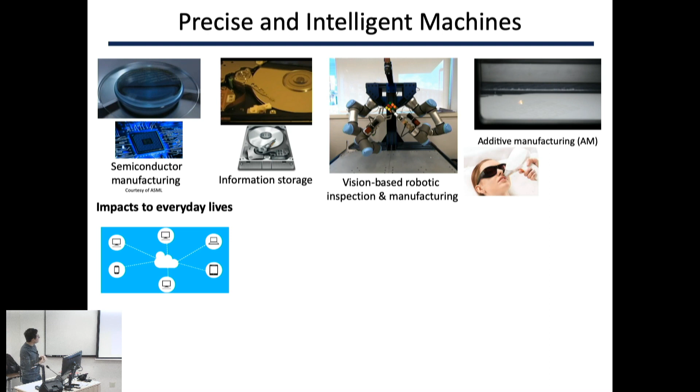I worked a lot on how the semiconductor industry manufactures the computer chips used in computers, cell phones, tablets, etc. It's a control problem you see over here. We are controlling the motion of these wafer stages precisely to make the process called photolithography happen in the way that we want.

I also work a lot on nanometer scale precision control in something you find in everyday life. It's perhaps the best example of precision control we can find in everyday life. Just $80 and you can have a nanometer precision control device: the read-write head in hard disk drive systems. They do super fast and very high precision control of the motion to either read or write data onto the spinning disks.

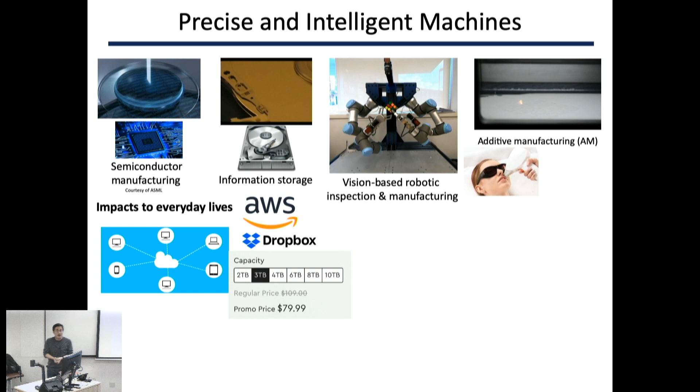I also work on robotic systems that look like this, mostly for manufacturing, and it's very playful. I find it super fun to work on these problems. We can solve a Rubik's Cube using robots, but this is just a demo.

It turns out many of the techniques we do here can be translated to do vision-based inspection, for example in the aerospace industry.

Another example I do myself is in manufacturing systems, using lasers to process very fine materials, either metallic or polymer powders. This is super useful nowadays to make parts in complex geometries and shapes, for example engine components for aircraft, where we want to use less material for better fuel consumption, allowing us to fly longer using lighter aircraft.

There are also a lot of scientific discoveries about being able to make complex things in a very rapid fashion. There's a totally exciting branch of papers about metamaterials, for example, that use additive manufacturing.

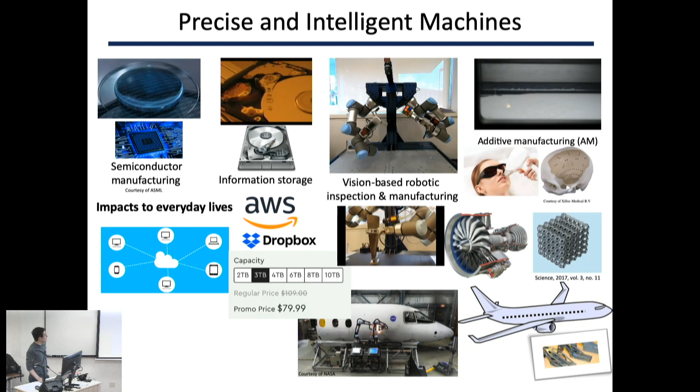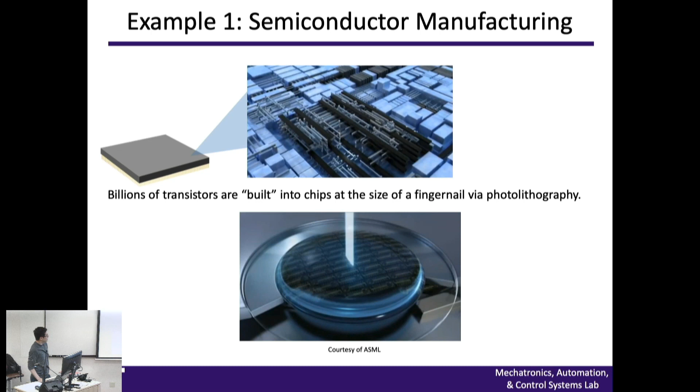To give you a little more specific ideas, this is the control we talked about for photolithography, where we use projected light to build billions of transistors onto chips the size of a fingernail. This is repeated many, many times, done in a very clever fashion, because the features we want to build into computer chips are so tiny. How can we make sure we're building such features precisely?

It turns out we have big patterns originally. We have a mask, and then we project light onto the mask, and use a lens to focus this pattern onto the wafers. So we need to control the motion of the wafer stage and the reticle stage very accurately.

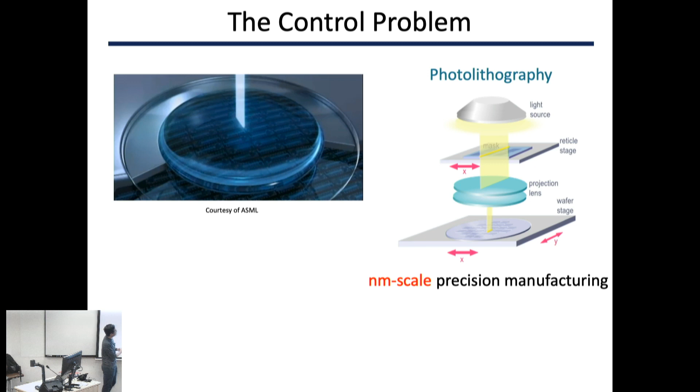Imagine how it looks in reality: drive from the airport to campus, drive it once, drive it twice, and the resolution of the control here is that the trajectory of the tires must be maintained within millimeter scale error tolerance. A human cannot do this; you must use advanced control techniques, and you have to maintain the same tolerance every day.

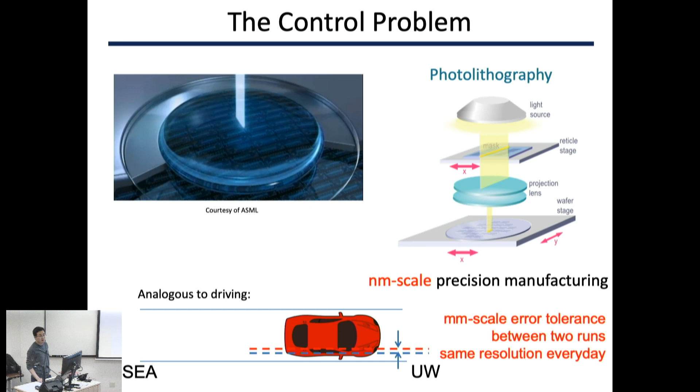With weak control, we cannot do that. With enhanced control, we can reach such kind of resolution.

More broadly, control is super important. We have lots of faculty in the mechanical engineering department working on precision control problems. I'm doing some of the things that you see here.

Just to recap the control problem here: it's like flying an aircraft at super high speed, just a tiny little bit of space above the ground, and you have to switch lanes very rapidly like this, and then you need to maintain the tracking of each lane accurately.

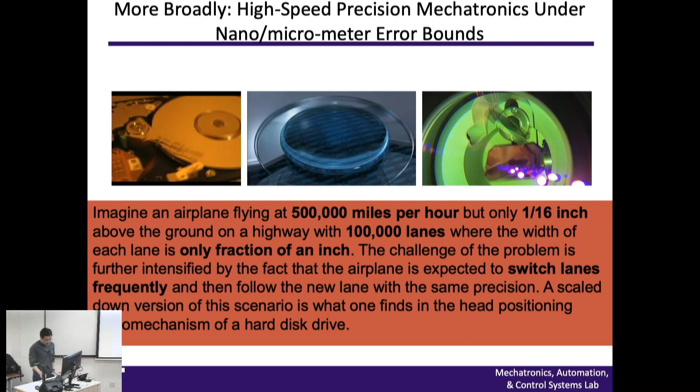Nanometer or micrometer scale precision control is a very important area that utilizes control heavily. I'll talk a little bit about some of the things we do here. My hope is that by introducing these examples, you will see how a control problem is formulated and then solved.

When we work on precision control of a very high speed spinning disk, we need to access data very frequently, and then there are these problems about vibrations. These vibrations happen because the disks are in an enclosed space with high speed airflow inside. This read-write head is literally just a tiny little bit of space above the spinning disks, so the complex aerodynamics creates vibrations. What we think is a super flat surface is no longer a super flat surface at nanometer scale precision.

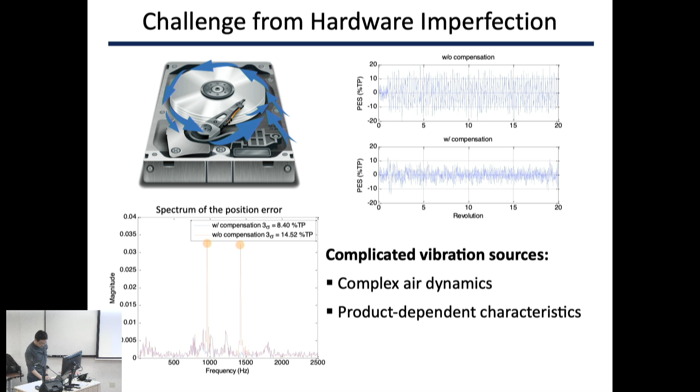The disk drive industry is now moving more forward to enterprise storage, where we use them in clouds, in data centers. This creates new problems. What was working perfectly fine may not work as we desire in this new application, because whenever you stack a lot of precision mechanical components together, you face the challenge of vibrations propagating from one disk to another.

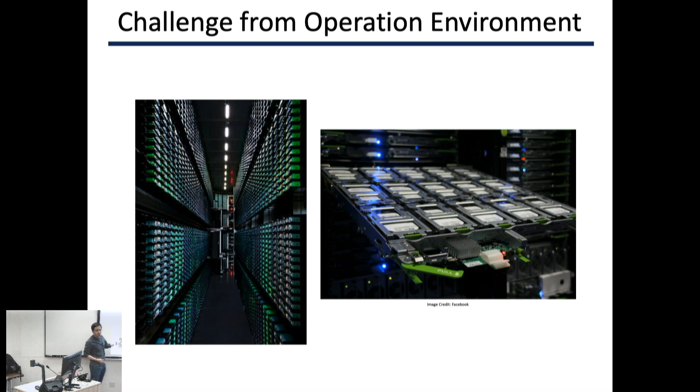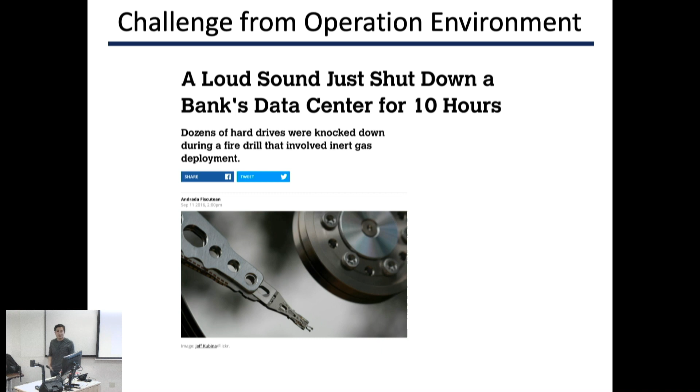Excuse me, Professor, can you pause for a moment? Do you have a cell phone in your pocket? I do. Can you put it away? Does it work better? Yes, okay, thank you, see, right?

Acoustics, vibrations, real problem. This is a super complicated problem, and it's new to control because you all know about the concept of bandwidth, below which classical control can do well. But these vibrations from the acoustics, from the sound, many of them are high frequency. When we speak, human voice can go kilohertz.

These vibrations are not covered by conventional controllers, and they are not single frequency like we saw previously. It's much more complicated, a very wide frequency band with multiple bands. This also depends on the environment, obviously, so control is even more challenging here. With good controls, we can reduce these vibrations at multiple frequencies.

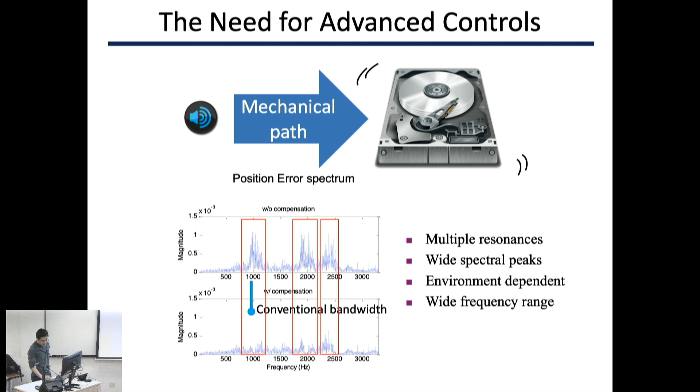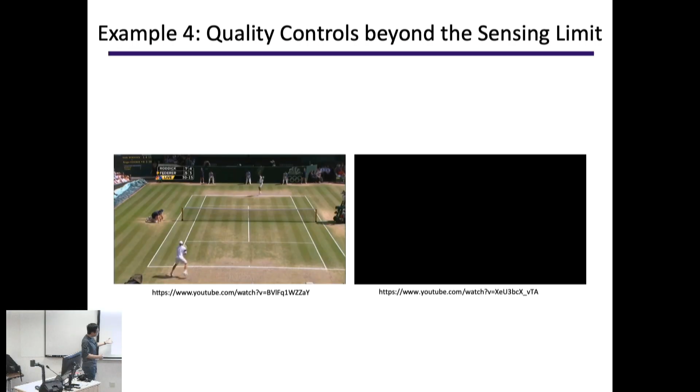All right. I have tons of other examples, and maybe today I'll stop at one that I hope will be really intuitive and interesting. If you think about how humans do control, it's not a precision machine, it's not a disk drive that can do nanometer scale precision control, but humans can do things like this. This can happen in reality.

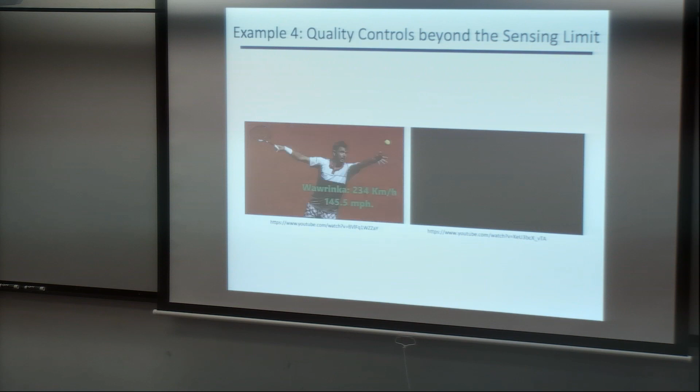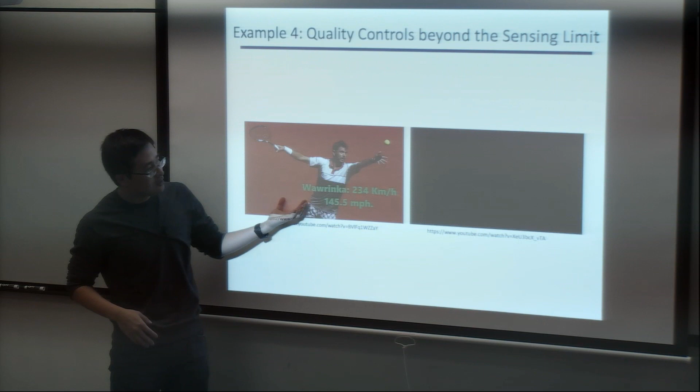When we play tennis, humans can go from this to something like this. We can catch a ball at very high speed during normal play. I cannot compete with them. You probably can't either, but some of you may become future tennis players who can compete at this level. But you see the point: control is something that we can learn.

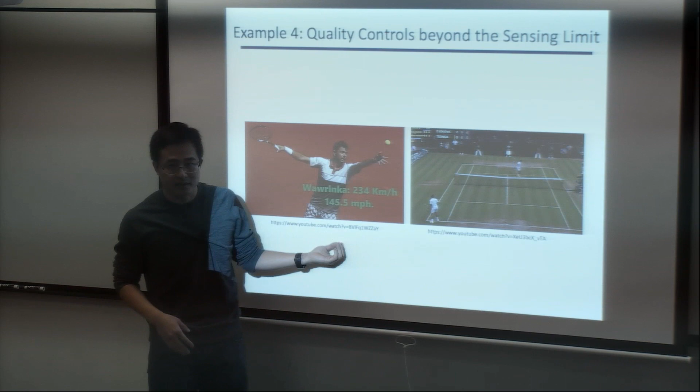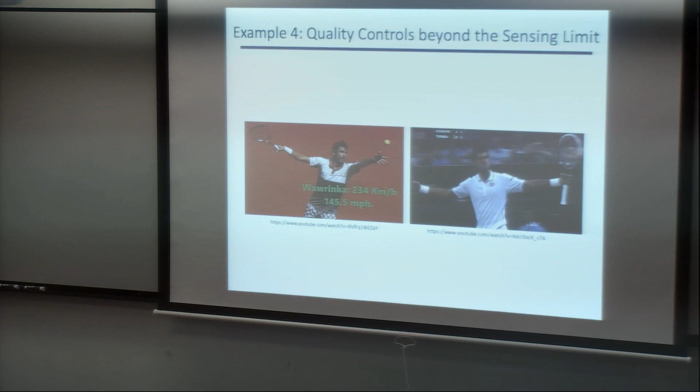As we understand the game better, as we understand our opponent better, we can build models, we can train ourselves, and if we do hard enough, we can do things that weren't achievable previously, and we can get super excited about it.

What we do from that point, if you imagine the key problems, one component is that humans use vision a lot for playing tennis, at least, right? Maybe we use our ears as well. These are sensors that have fundamental limitations. I cannot see from here to the East Coast. I cannot hear what's happening in a different town.

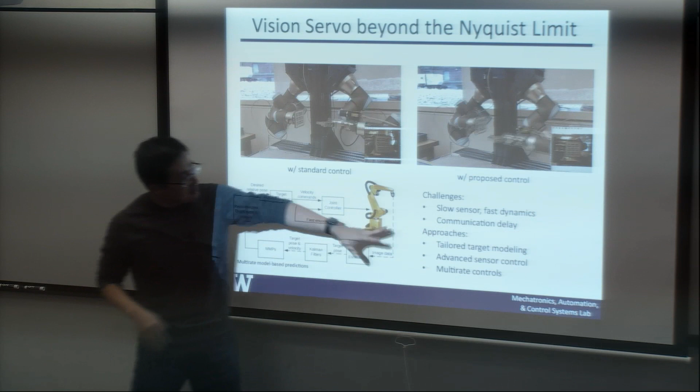These sensors have fundamental limitations. Cameras usually have 30 frames per second, 60 frames per second. They have limitations on how fast they can measure. But humans, as you saw in the previous example, can learn from that. Humans can do things using these slow sensors and can play tennis at a very high level.

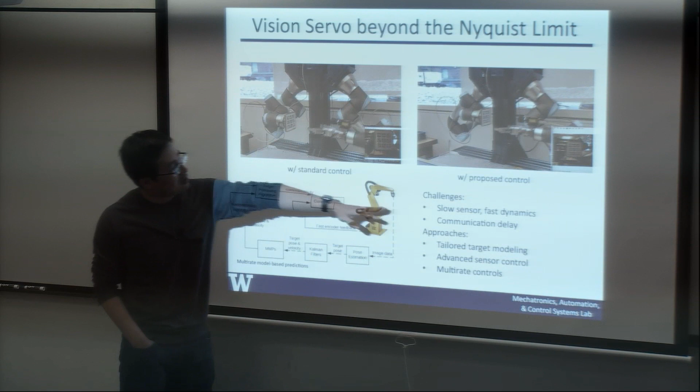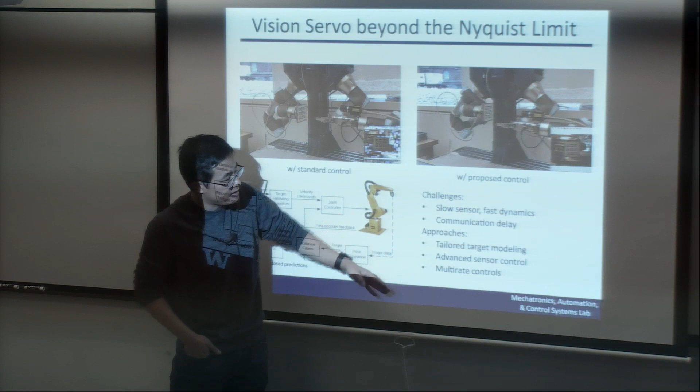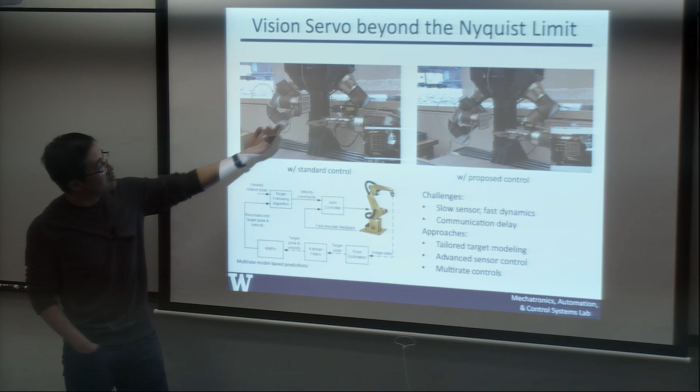We're doing something using slow vision sensors, and in view of the potential delays in communication with this large video data, it turns out that by doing controls, by doing modeling tailored for the application, by doing control of the sensor, we can create algorithms that track a moving object. This is with standard control, and with some advanced control, we can do better.

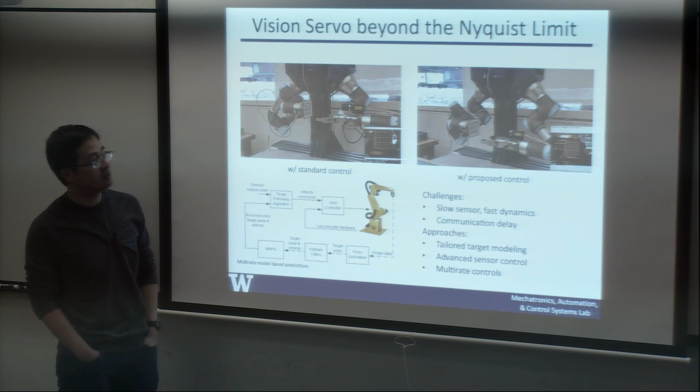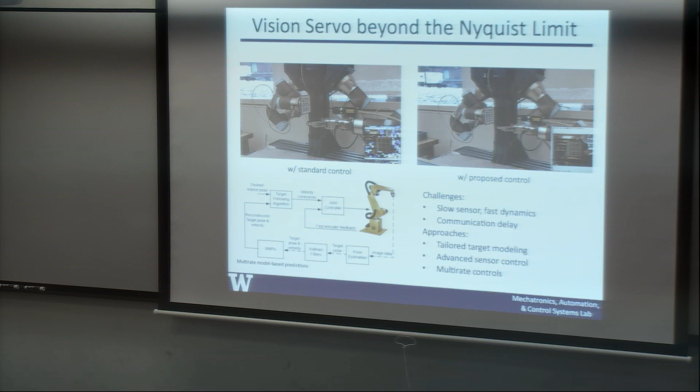These are some examples, at least, from my research. There are a lot more, as I mentioned. The field of control, I think, is really exciting. As we move together through this quarter, I hope to introduce more examples to you, either from my research or from colleagues at the ME department or elsewhere.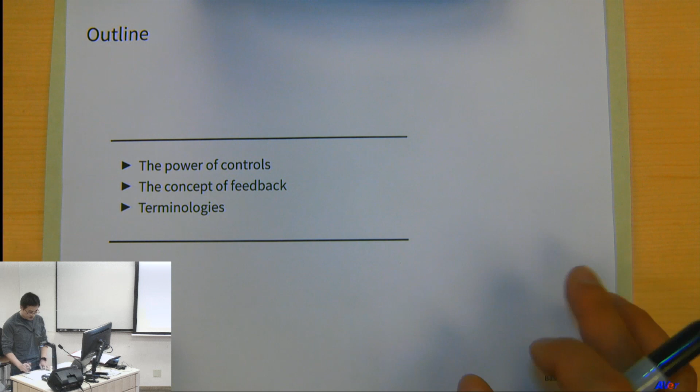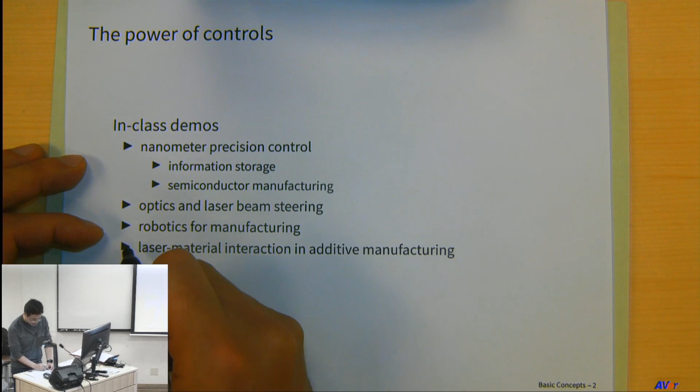Thank you. All right, that's the outline: power controls, the concept of feedback, and terminologies. We demonstrated nanometer precision control, laser-based additive manufacturing, and robotics for manufacturing. I didn't talk about this one yet; I might come back to it someday in the future.

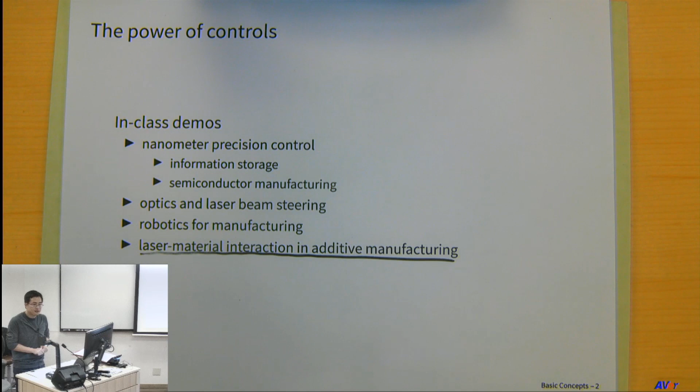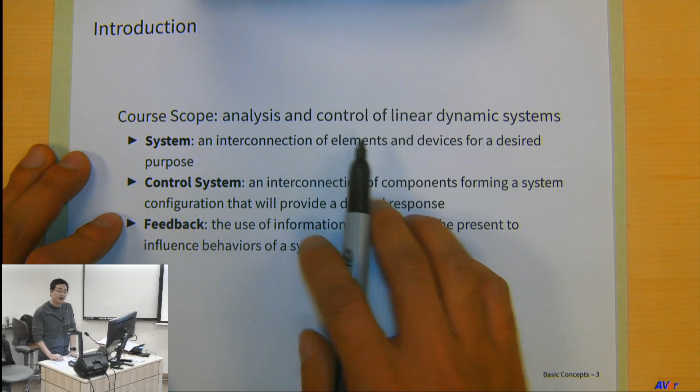The control language used to work out the planning of these systems is mostly based on linear control theory, which is what we talk about in this class. The scope of this class is about analysis and control of linear dynamic systems, to be more precise.

In this set of notes, I would like to formalize these concepts clearly, starting with systems. A system is an interconnection of components that serve some purpose. A human is a system, an integration of body and different components—a very versatile system. A hard disk drive system is formulated to do one thing really well, which is controlling the read-write head to access data.

So a system can be uncontrolled or controlled. The control system is the integration of components forming a system configuration that will provide the desired response. We apply controls, and then we see a response, and we can use that response in what we call feedback. Feedback is the use of information, either from the past or present, to influence the behavior of a system. All these examples use feedback.

It happens in everyday life too, if you think about it. Every day when I wash my face, I do feedback control. Because it's winter time, and the water is pretty cold in the morning, how I adjust the temperature of the water is a feedback control system. I first turn on the cold water, then the hot water—it's not an automatic process. I need to adjust how much hot water I get to reach the temperature I want. So it's a feedback system, a control system.

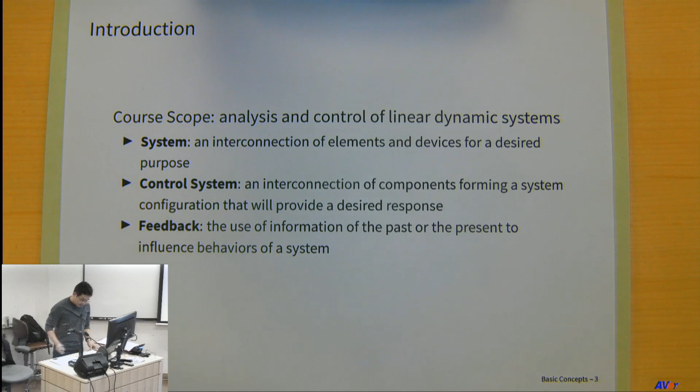That's just one example. But why do we need automatic control? Sometimes it's for comfort—if I have warm water, I feel more comfortable. But also there are many applications where feedback control, automatic control, is super important because humans just cannot do the things required. I cannot put my arm in the oven to measure the temperature. We have to use a feedback control system.

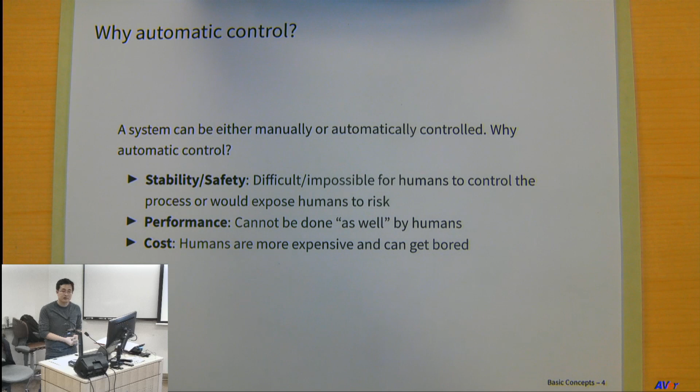Stability and safety is a big issue. Some tasks may be difficult or impossible for humans to do, so we need computers to do that. Or it may just be about performance—I cannot do nanometer scale precision control. We need these advanced control techniques because humans cannot do as well for many tasks. Also, humans can get bored and tired. So cost, either time or money, is another reason for the importance of automatic control.

Those concepts are relatively intuitive. Now I would like to talk more about the language we speak in control system analysis. Most of the things we do in this class can be translated into a block diagram, where we have a process, which is the thing that we want to control.

We want to control the output of a process—it's either the temperature of the water I use to wash my face in the morning, or it may be the position of a read-write head in disk drive systems. So there is the process whose output I want to control, and then I have some actuation to be able to influence it. The actuator is a device to influence the controlled variable of the process.

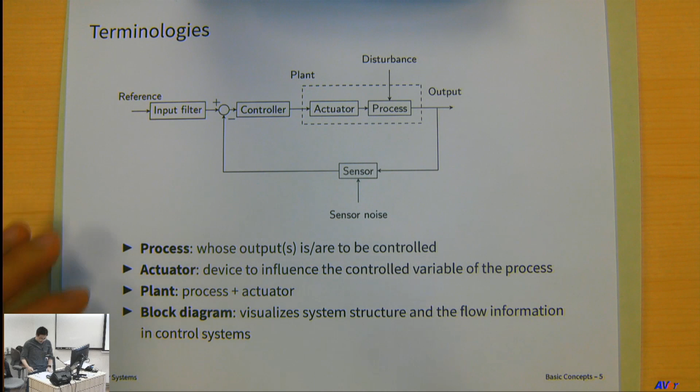The actuator in my washing-my-face example is the knob of the faucet. If I drive a car, the actuator would be the pedal that controls the torque of my engine. So the actuator and the process together form a plant. The plant is what we want to control using a controller—we generate control commands to this plant through the actuator and the process.

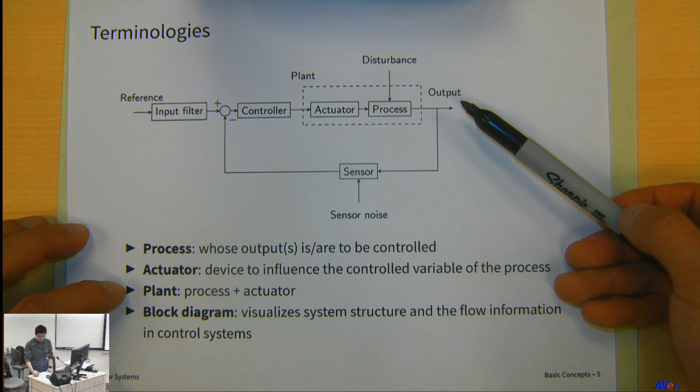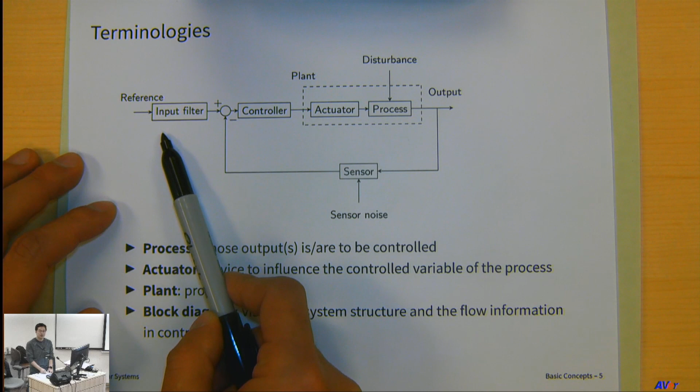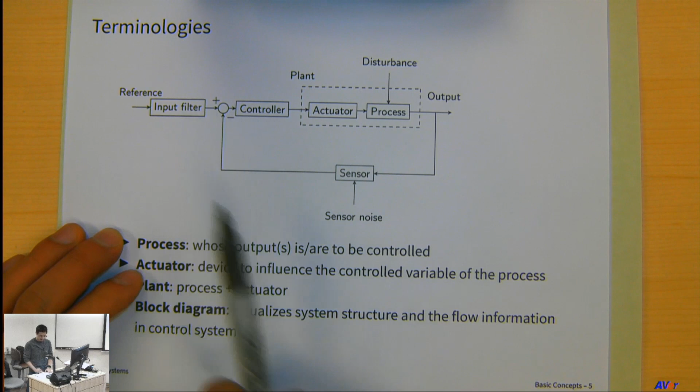So there may be additional components, obviously. We need sensors to measure what's going on. We need sometimes to filter a little bit of what I want in terms of feeding back to the system. I may have a concept of temperature that I want, but I may need to translate it a little bit so that's what the HVAC system in the house will look like. So I have a desired value - this is what I do nowadays with those thermostats. You can program it: I say 66 degrees when I'm out, 69 when I'm back. We need to filter what we want. We need to do a little bit of planning before we send this information to the controller. So input filter - this is very common in many control applications.

Very importantly, there's nothing that's perfect in practice. A lot of processes or plants are imperfect in many ways, so there will be disturbance going into the system. For example, if I drive a car, it's not just me driving - everyone is on the highway in the morning, and the disturbance is all those congestions on the highway. And then the sensor is not perfect either. I talked about vision having limitations on the speed that I can measure. In a lot of sensors, there are other kinds of noise as well.

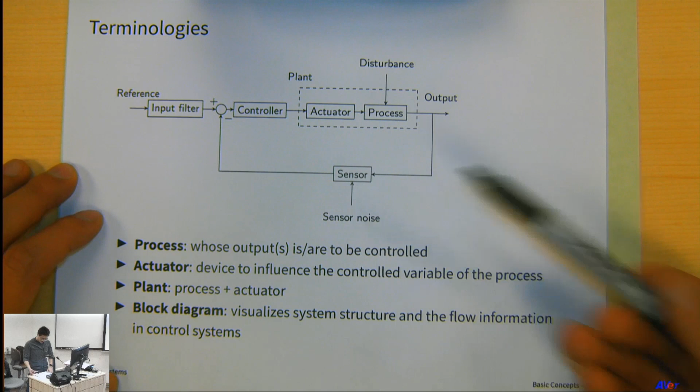Reference is what I want - it's what I want the system output to behave like.

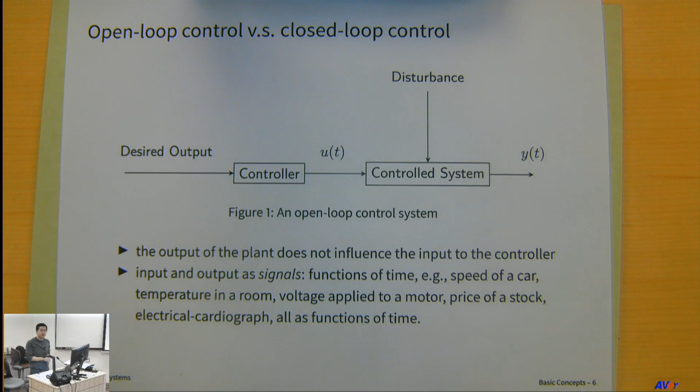You guys are probably very familiar with the concept of the difference between open loop and closed loop control. So open loop is something that looks like this in a block diagram. You have what you want, you have a system to control, and you just go forward. It's like if I want to walk a straight line, I close my eyes and then walk - that's open loop control. So I don't do feedback in open loop control. I don't measure the output of the system and use it to improve my control. That's the main concept of open loop control.

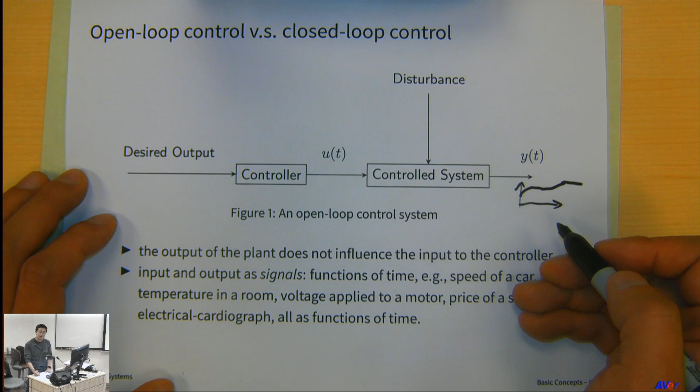Very importantly, the control system that we deal with - this desired output and this actual output - they are signals. They are usually not like a constant value, so they are functions of time. Either the speed of the car or temperature in the room, they are all functions of time. These are signals, either as a continuous function of time - for example, if I want my temperature to look like some profile that looks like this, maybe it's cold during the day and warmer when I come back. A signal can also be a discrete time signal, meaning that a signal can be something that looks like this.

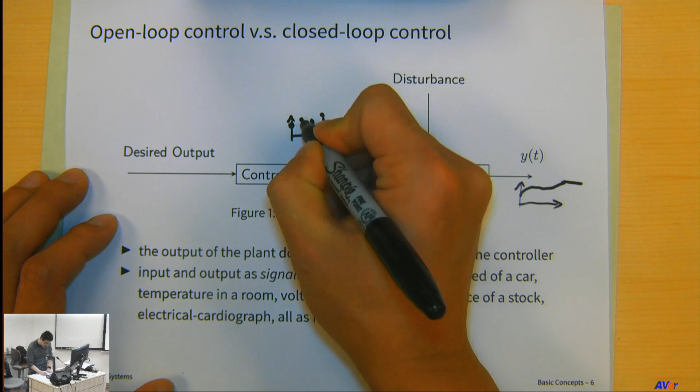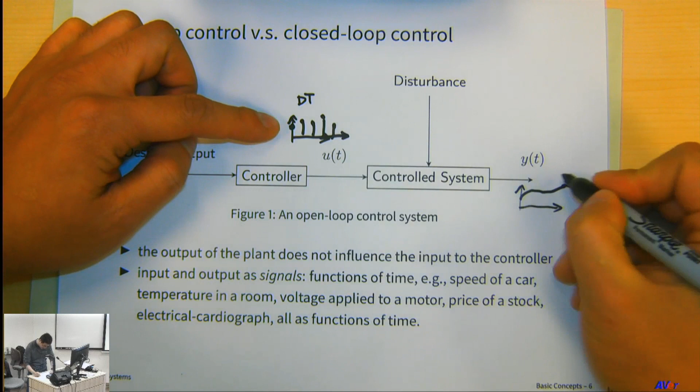It's still a function of time, but it's updated only at specific time instances. As a matter of fact, modern controls - the direct output from the controller is a discrete time signal. It's updated at every sampling time of a computer CPU clock, for example. So signals can be both discrete time and continuous time. My notation is usually discrete time and continuous time - dt and ct.

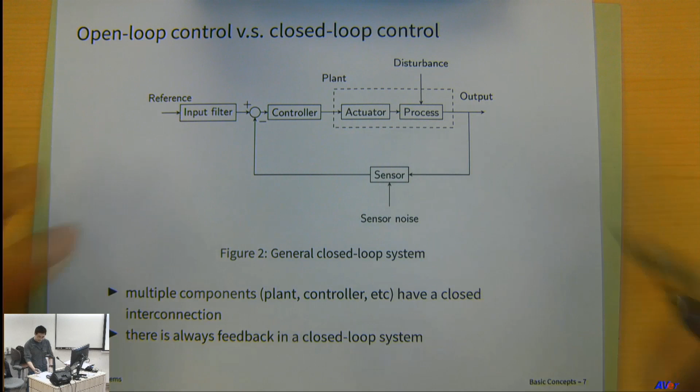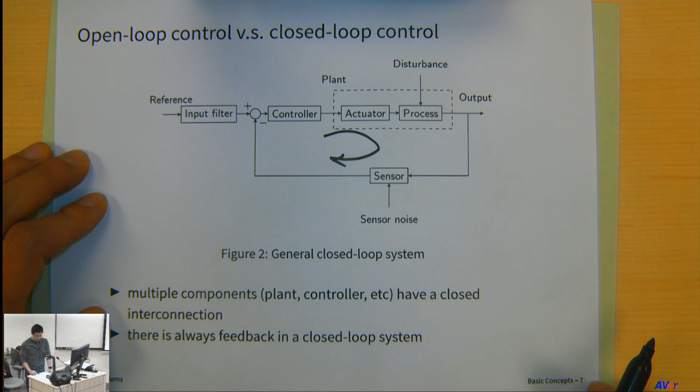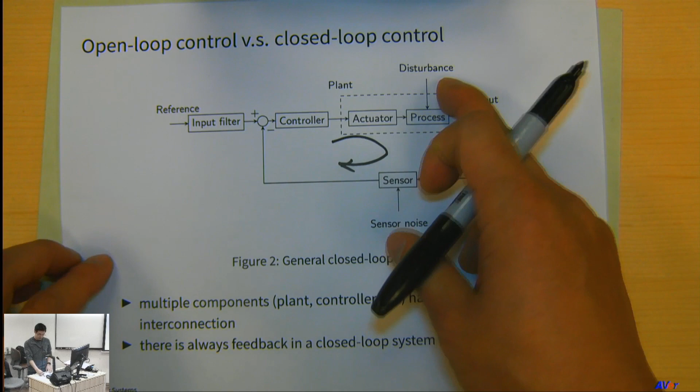That's open loop control. Now closed loop control is what we do a lot, what we need to do a lot actually in practice, because we talked about there being disturbances into the system, and then there's sensor noise, and the plant is not perfect as well. So what we do is we use feedback, to be able to accommodate some of the disturbances over here, some of the sensor noise over here. This is a closed loop system, because these components have a closed interconnection - so we have a loop over here that is closed. So a closed loop system always has feedback, and the purpose can be many things - there are many ways that we need to do closed loop. Disturbance accommodation is one of it, and that's one important aspect of it.

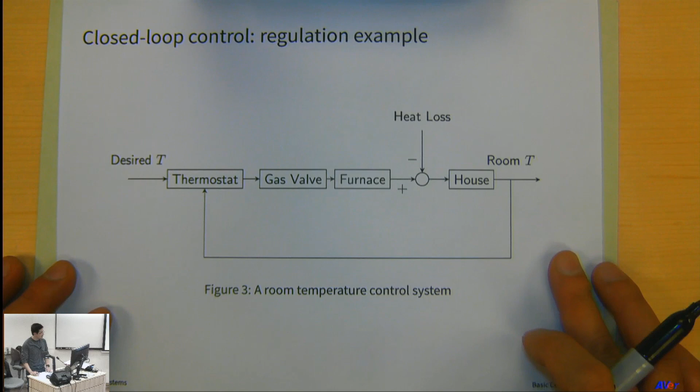All right, let's work out an example about temperature control - it's an HVAC system. Let's think about the concepts of plant, actuator, disturbance, controller, and how they can be put into this block diagram.

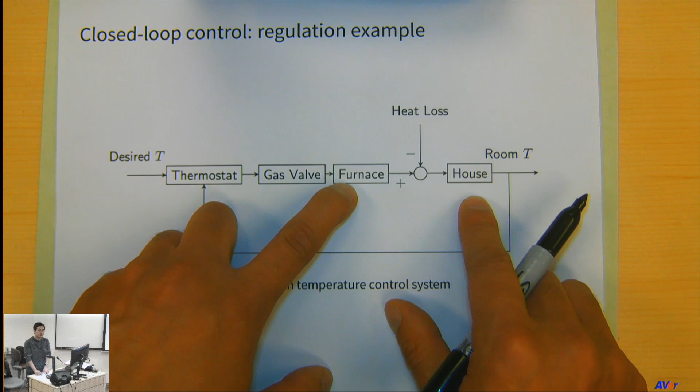Here, what I want to control is the temperature of the room. I have some desired value in my mind, so I set it in a thermostat. And then the thermostat is going to do, nowadays usually PID control, to the house. What is the process that I want to control? Perhaps the whole thing - I want to be able to control the furnace, how it generates heat to heat up my house. The process actually involves its own complicated dynamics, if you think about it. To heat up a room, there's convection, conduction, all these physical processes happening. So these are what I want to control - it is a process that we formulate and put into a block diagram.

What is the actuator here is the valve of the gas that goes into the furnace. That's the actuation that the thermostat can control. The thermostat will send out either current or voltage signals that define the degree of open for the valve, and then that valve influences the process.

And then we have the feedback. The control is being done over here.

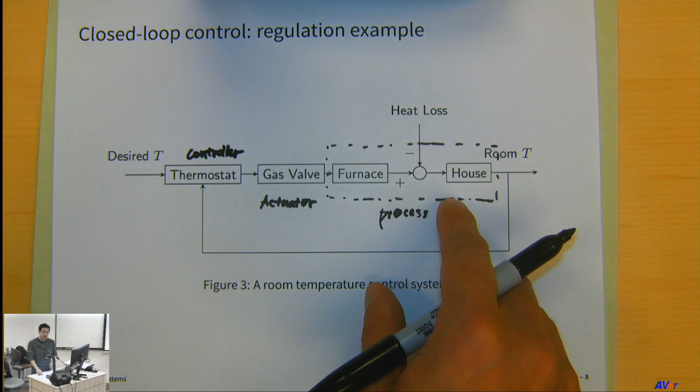So obviously there is heat loss in winter, right? A lot of the heat will be lost in the process. Either the furnace is not perfect or the temperature outside is low. So this is the disturbance.

That's how we can treat the system in a block diagram terminology.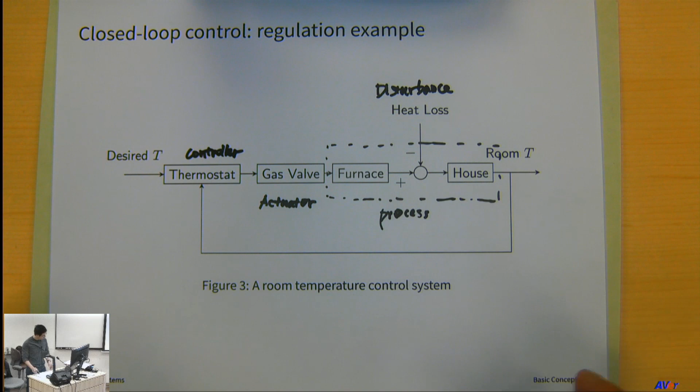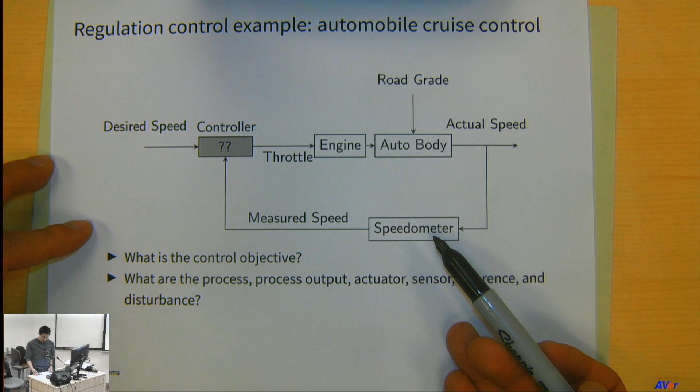Now let's look at another example as an exercise. Think about the control system in ACC, Automobile Cruise Control, which is very popular nowadays. We have the engine of the system, we have an auto body, we have sensors that can measure how fast the car is moving, and then we have a controller. It is a human or an autopilot in some of the modern cars.

The control objective is, in cruise control, to be able to follow a constant speed that I set, or if there are cars in front of me that block me from going to that speed, I will try to follow the speed of that car. That's the objective. Now, with that in mind, what is the process?

Output, actuator, sensor, reference, and disturbance. So I'll give you guys a little bit of time to think about it, and then we're going to work it out together.

All right, any volunteers want to talk about it? What's the process? Let's start with the first one, maybe.

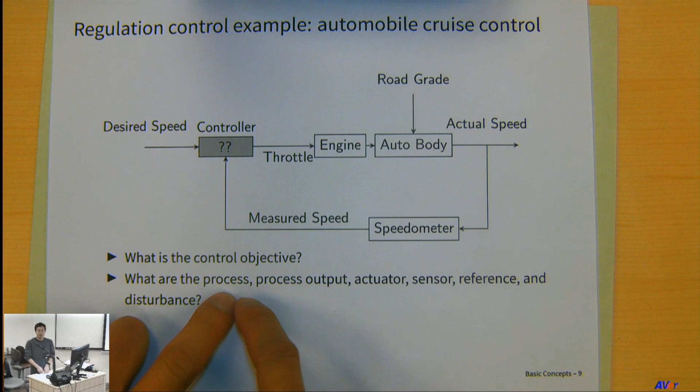Process is a moving car, right? I have an engine that generates torque that translates to the wheels, and then the wheel will move my car. This is the process.

That I want to control, and the output is the speed of the car. The actuator is the pedal that I can control. A human is the controller, right? So this is the actuator. The whole thing together is the plant. Usually in this class, we use P to represent a plant.

Now, cars have sensors for the speed. And then there's a reference, which is what I want: either the speed that I set or the speed of a car in front of me.

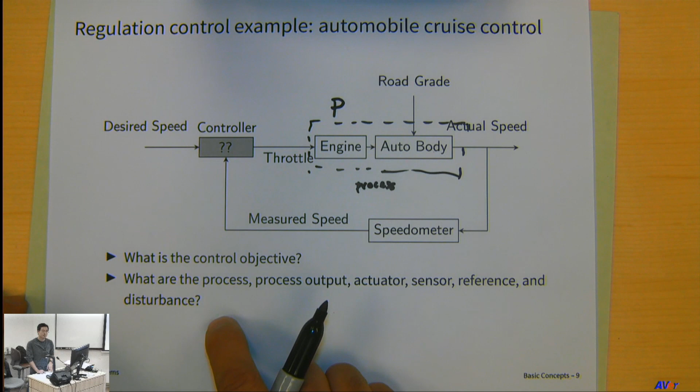And then what are the disturbances? If I'm following a car, most of the time the disturbance is the road condition. If I don't switch lanes, then the road condition is going to be my disturbance. If I'm going uphill, then it's going to be more challenging if I keep the throttle at the same angle - I need to put more torque to the car. If I'm going downhill, then less torque. So the road condition is the disturbance here.

That's an example about what we call regulation control. I have a desired speed. If there's no car in front of me, I want to keep the actual speed of the car exactly the same as the set number.

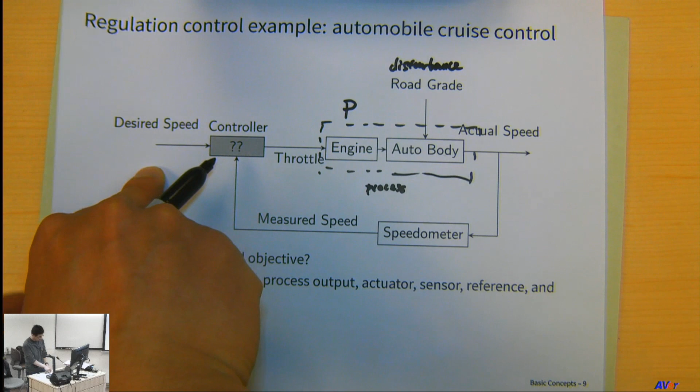All right, we talked about control objectives. I would like to quickly wrap it up, summarize it, and list some of the control objectives that are very common in practice.

So control objective can be either stability, the system is going to be more stable, right? Human control of the temperature in the house is not as good as a good thermostat can do. It's either better stability or performance.

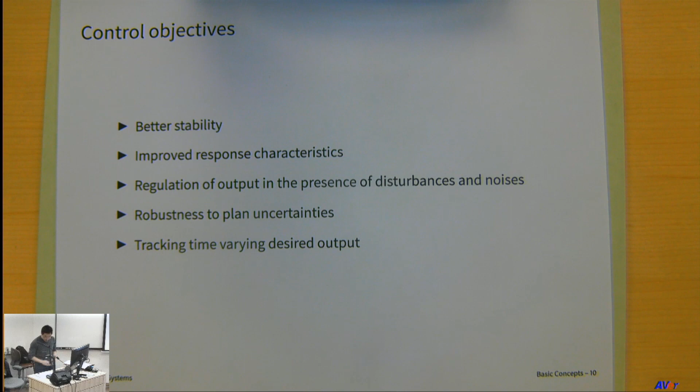Or there can be disturbances in the process. Our objective is to make the system output exactly the same as best as we can in presence of these disturbances and noises. Regulation is a very common term in practical control systems.

And then it may be that we want to be able to track - the main objective is to track some reference command. It's not to be able to stay at a given number all the time, but there's a profile that the control system wants to track. So tracking control is another class of control objectives.

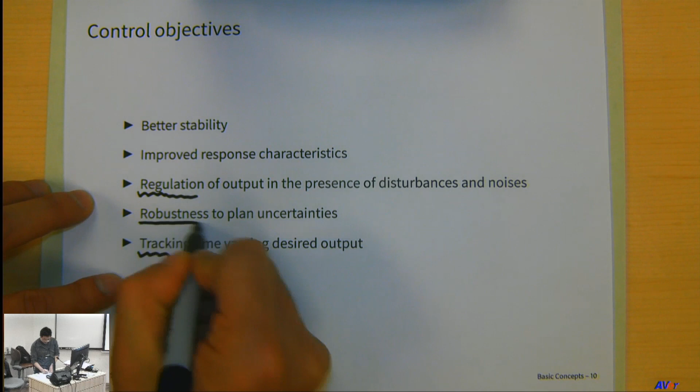These are pretty common. And then robustness is something a separate class will treat more heavily, robust control theory. The idea is actually pretty important and straightforward: in practice, there's lots of uncertainties in the system that we control. So I may think that my car moves, I put throttle, and then I get speed outside.

So maybe it's acceleration translates to speed, translates to position. So that's like integration, simply. But in practice, it's not really that simple. These things, the model that we built to formulate the plant is not perfect. There can be uncertainties in practice.

But what's amazing about control is that it turns out using advanced control techniques, we will be able to control an uncertain system reasonably well so that it can behave in the way that we want. This is a very important and really exciting field.

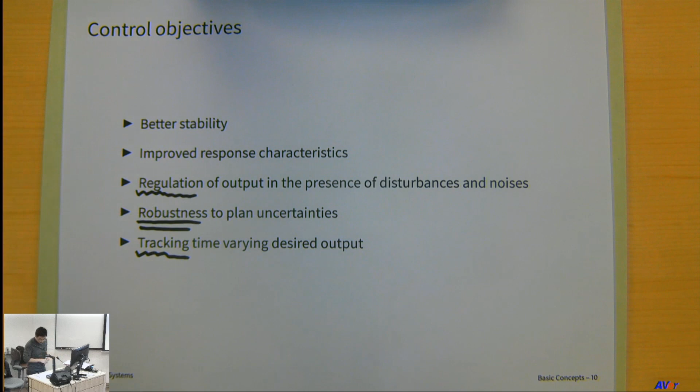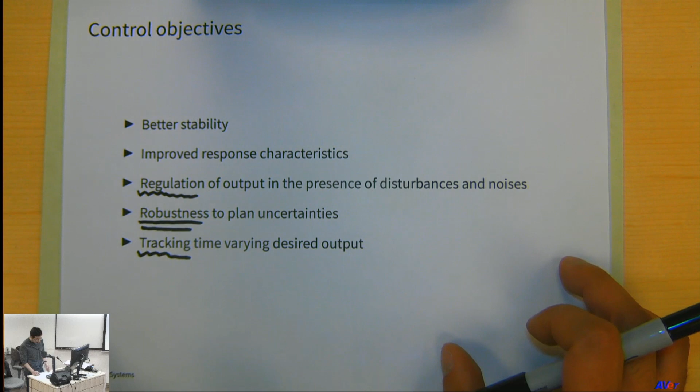Control objective can be just wanting the system to be robust. Sometimes these objectives occur at the same time in practice—there may be times I want to ensure stability, and in the meantime be able to do regulation or tracking control in presence of uncertainties. Different applications call for different objectives.

How we achieve these objectives is as follows—these are the main things I want to highlight in this class. The way we build control systems to do robustness, control, tracking, or regulation roughly follows the same pattern. First, we need a good understanding about the process, understanding what we are controlling in order to do well.

So the first thing we do is model the plant. These are usually mathematical models described either from ordinary differential equations, with transfer function being one class. We need some abstracted mathematical description of the system.

Having the model, we can analyze how it looks like. By the end of this quarter, hopefully we'll provide enough materials so that when you look at a formulation, a plant, a state space description, or a transfer function description, without doing any controls, you can have a better understanding—is it going to be difficult to control, how fast, what kind of speed can I control the system, all these kinds of things.

Hopefully by the end of this quarter you'll have the insights to tell right after the modeling step. After looking at the system a bit, you can design algorithms, design controllers. After doing the design, you can see how it fits, whether it's meeting what you expected, so you analyze again the performance and robustness of the control system.

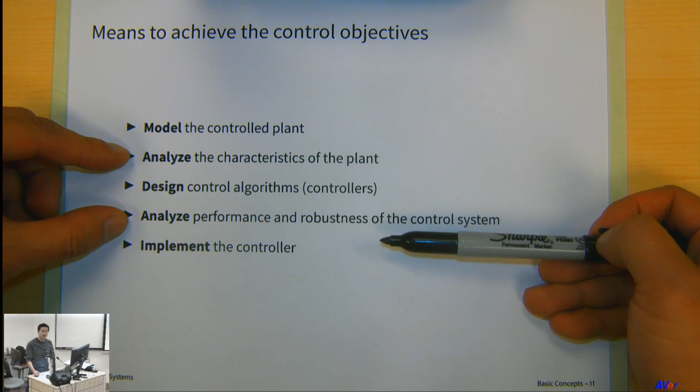I will analyze as much as I can about these techniques and build examples to illustrate these concepts. That's a rough, big picture of the terminologies of control systems and what this class is going to cover.

You can go, obviously, way beyond what this class can offer. Some of the resources are listed here. There are many societies of control systems, from AIAA, which is more focused on aerospace, to ASME, the American Society of Mechanical Engineers. They have a Dynamic Systems and Control Division that does a lot of applications and research into controls.

These societies all have their own publications. AIAA has the Journal of Guidance, Control, and Navigation, so you can tell pretty much what that journal covers. In ASME, the Journal of Dynamic Systems, Measurement and Control is a little easier to start with, so I encourage you to read some materials here before moving to other societies.

Then there's also IEEE—this is more electrical engineers, but now it's quite mixed; mechanical, electrical, and aerospace engineers all publish in IEEE. They have a Control Systems Society with different publications. A very good one to start with is Control Systems Magazine, which covers applications, theories, and tutorials that are very exciting to read.

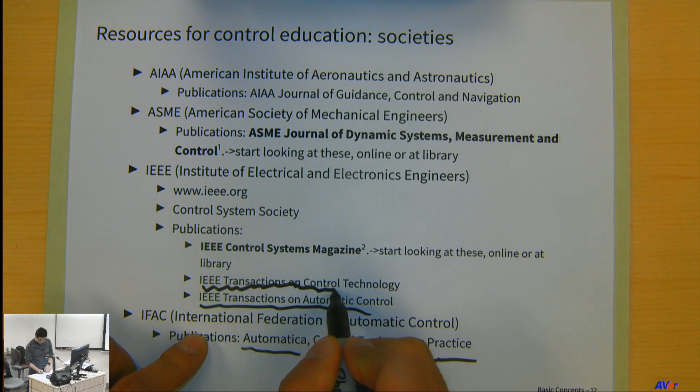There's also the International Federation of Automatic Control. This is a very big society, with publications like Automatica, which is more math heavy, and Control Engineering Practice, which is more application focused and contains a lot of applications. You can experience a lot by going to these available resources.

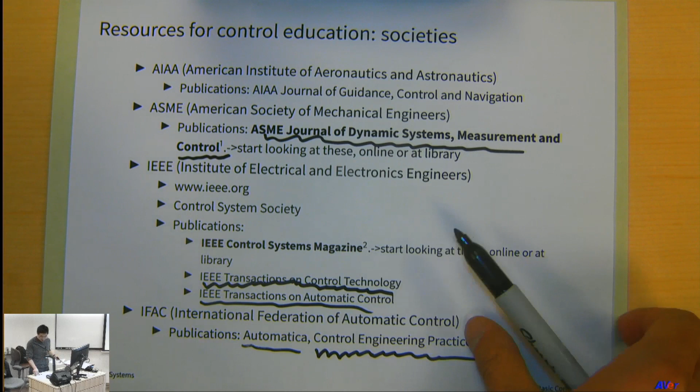That's where you can go beyond what this class will offer. Any questions?